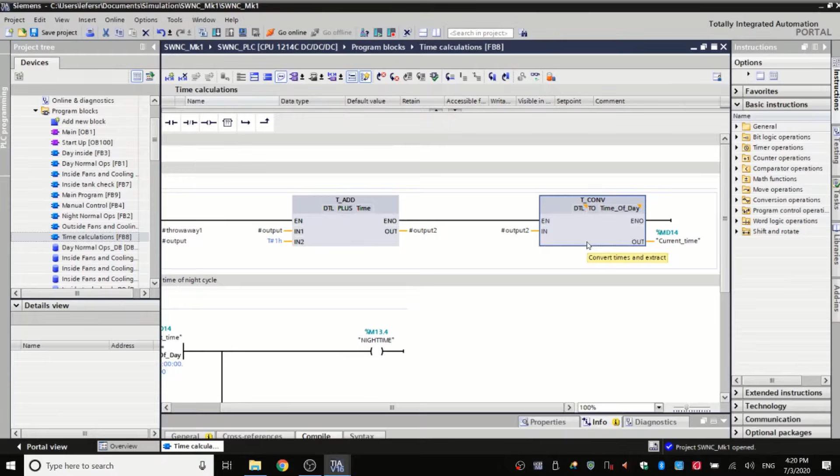I've put this together as when I was getting into PLC programming, my first port of call was the online forums, which can best be described as just a hot mess of confusion. Following this, we got the trusted F1 key, and granted it goes into a lot of depth and it is really good, but it's one of those catch-22 situations. It only really makes sense once you know what you're doing. But bear this in mind because we will be touching on it later in the video.

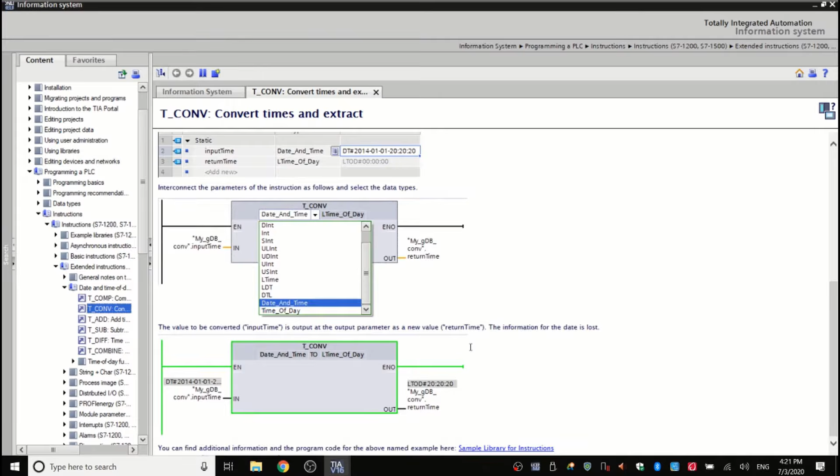So I've made this video for people like me with no formal training in TIA Portal, but they just need to find a solution to get the job done. So speaking of which, you click the link, you know why you're here. Let's be honest, it's a pretty niche video. It's not going to be hitting the trending page anytime soon.

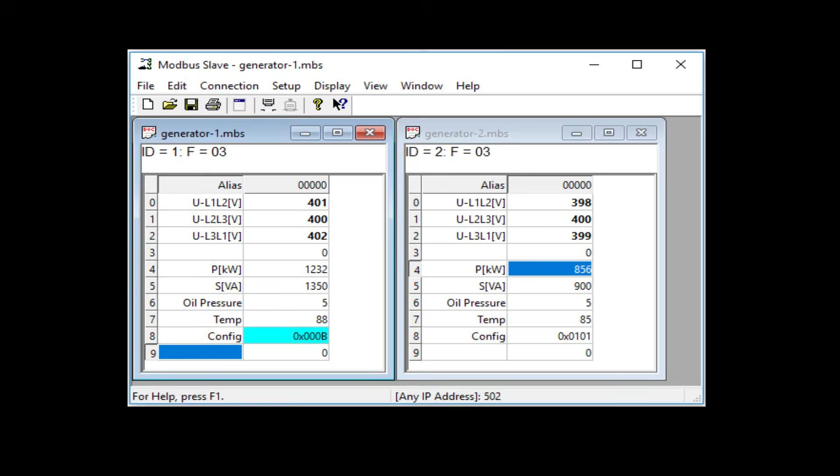So today we're mushing together a Siemens 1214 PLC and a CB 1241 comms module insert and getting that to talk to a Modbus Slave that is running on my absolute unit of a field laptop. That's the dull hum in the background I'm hoping my microphone's not picking up. So let's get started with the wiring. How do we put this thing together?

Right, so here I've drawn out the schematic of how I've wired my module up. At the top we've got the 1241 module, and underneath is my RS-485 to USB converter. We're setting it up in what's called a half duplex or 2-wire mode for the RS-485, and to be clear, RS-485 is the actual wire and hardware side of stuff, and Modbus is the protocol or language, if you will, that will be talking over that RS-485 connection.

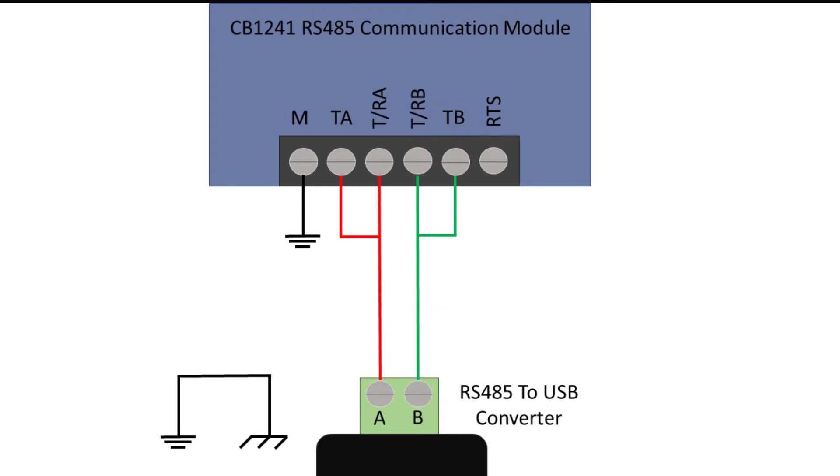As you can see, we've tied the TA and TRA terminals together, and the same on the B side, as there's some internal resistors in the 1241 module that we want to make use of. These wires go to the A and B terminals in the RS-485 to USB converter. The M is for the common ground, and you want to connect this to the ground of whatever you're communicating with. You may be able to get away without doing this, but especially here where I am, we got a lot of earthing and grounding issues, so it's kind of a must.

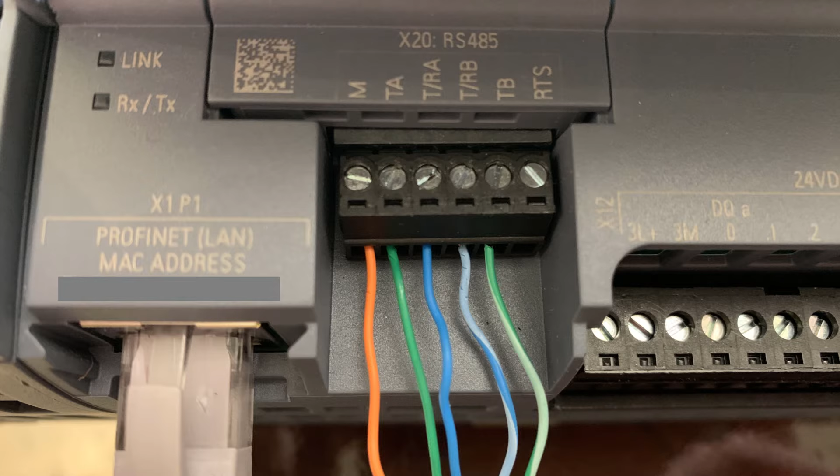Here you can see my actual connection. I got the TA, TRA, TB, and TRB connections all on separate twisted wires, as well as a separate connection for the ground. In this example, we're not going to be using any request to send signals, so I've left the RTS connector unconnected.

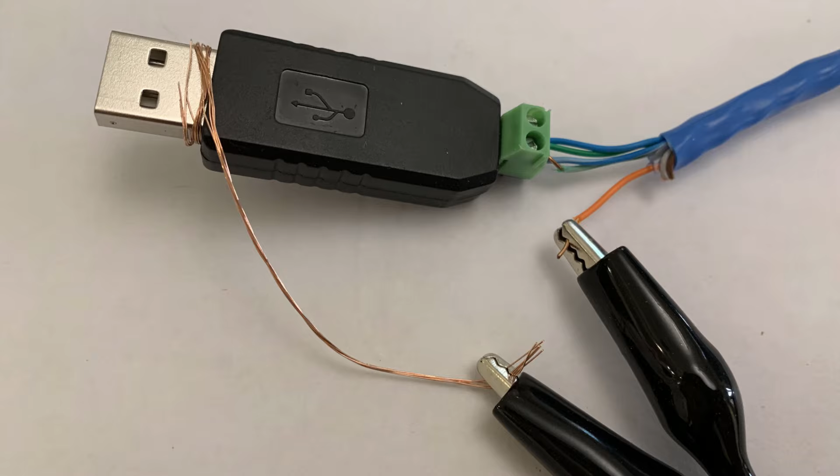Here you can see the termination in the USB device with the TA and TRA wires into the A terminal and the TB and TRB wires into the B terminal. In this setup, the little orange wire sticking out there is my ground. Like I said, the earthing situation here is a bit of a nightmare, so I've gone absolutely OG in connecting the ground of the module to the chassis ground of the laptop.

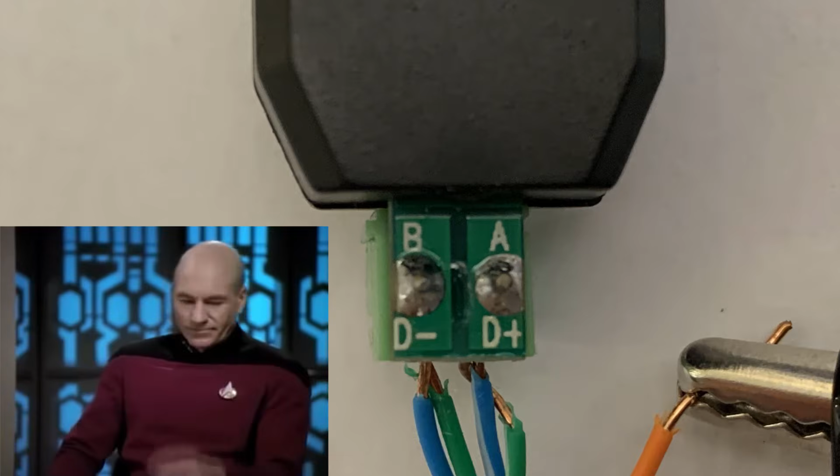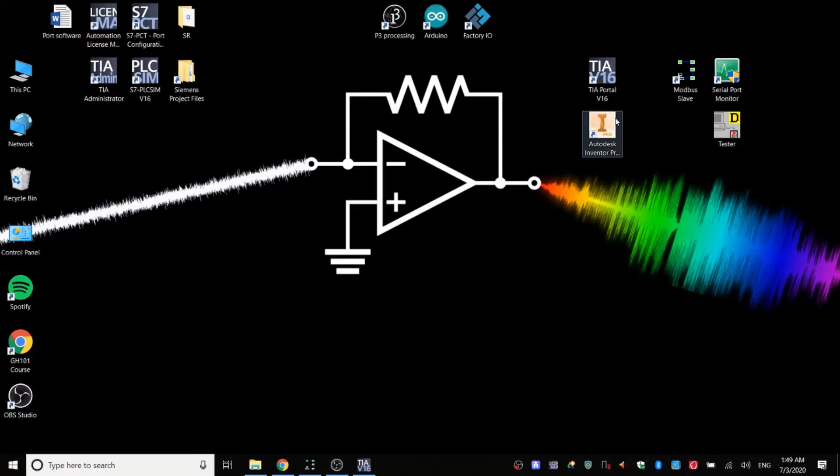Okie dokie, so that's the wiring sorted. Wasn't that fun? Now let's get into the guts of her and get this programmed up in Step 7, or TIA Portal, and down with the kids. Okay, so let's get to the programming side of stuff. So I'm going to start us off in a completely clean sketch, but the first thing I'm going to show you is the Modbus Slave. I'll put a link in the description to where I downloaded this from.

But we're just running a holding register here. So we've got 10 values in here from 0 to 9. Got most of them static. I've got the first one just iterating through some numbers so we can actually see that we got a live communication going on. For the setup, using slave ID 1, like I say, we're using a holding register, and this is going to come into it. So the address here is 0, the PLC address is 40,001, so remember that. Quantity 10 is just the number of these guys. That's about all you need to really know for this initially.

We're running it on a half duplex setup, so we don't have any request to send or anything like that. Oh, it is connected, there we go, I left that on. So in here, serial port, this is just my USB to RS-485 converter. I'm running at 9600 baud rate, 8 data bits, no parity, and 1 stop bit. Again, like I say, no RTS or anything like that enabled. And we're in RTU mode, not ASCII. So there we go.

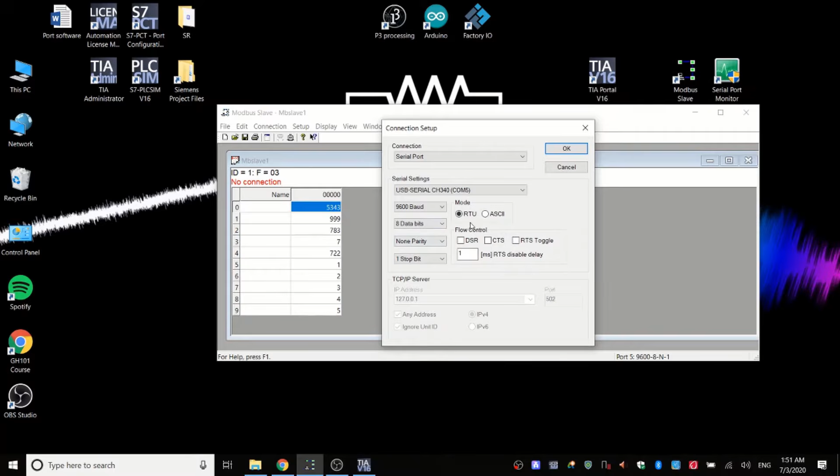That is all set up and running. Good. Let's get to the guts of the stuff. So it's a completely clean build. I wanted to show you it this way just because that's the way I like to set it up, so you're not overlapping memory bits with clock bits later on. But that's just me, so if you're better than me at this, feel free to do it in a different way. So I'm going to add a new device,

and this is going to take a while to load sometimes, so I might just pause this and go in super fast motion. Find a PLC. Pro tip as well, because I've got a bunch of different analog inputs and outputs on there, rather than having to specify them each time, if you come down here to unspecified PLC, I'm running a 1214 system, find the unspecified version of that, click OK, and then when it comes up we can just auto detect all the stuff on there.

It saves you a job having to find all the right serial numbers and versions of the right analog inputs, outputs, digital inputs, outputs, what CM board you have, all of that good stuff.

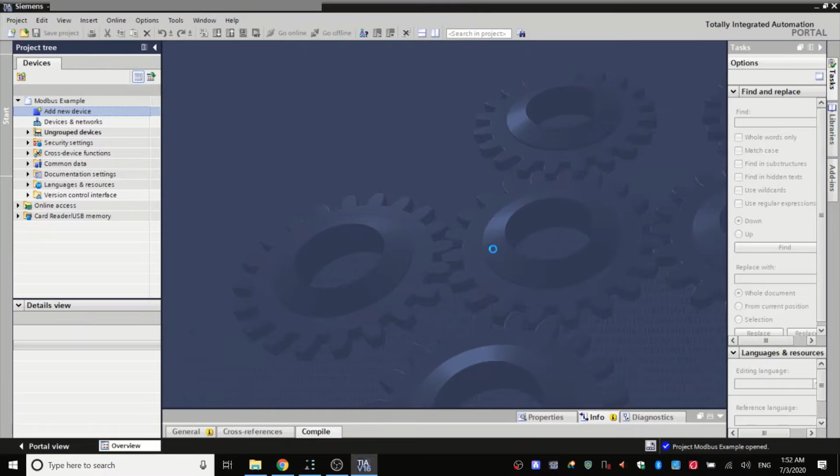Oh my god. Oh, there we go, that was fun.

Right, so as it's unspecified, we're going to go to detect.

I gotta make a coffee.

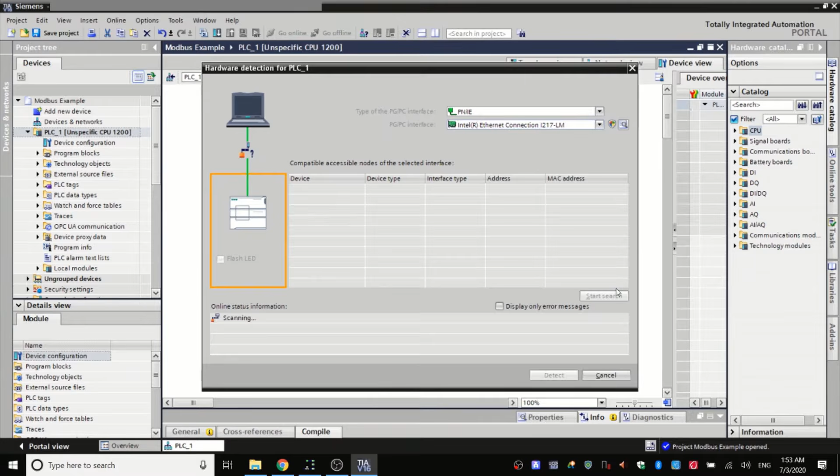Here we go. So have a look over the Ethernet. Now I've got my laptop directly plugged in to the PLC. So it's found a thing. Simple Modbus. Good. So it's found all that. Detect. And because it's found it, it should auto detect all the extra I/O I've got on there. Ta-da! There we go. So you can see I've got 4 extra modules on this side and the actual CB1241 itself on the front there.

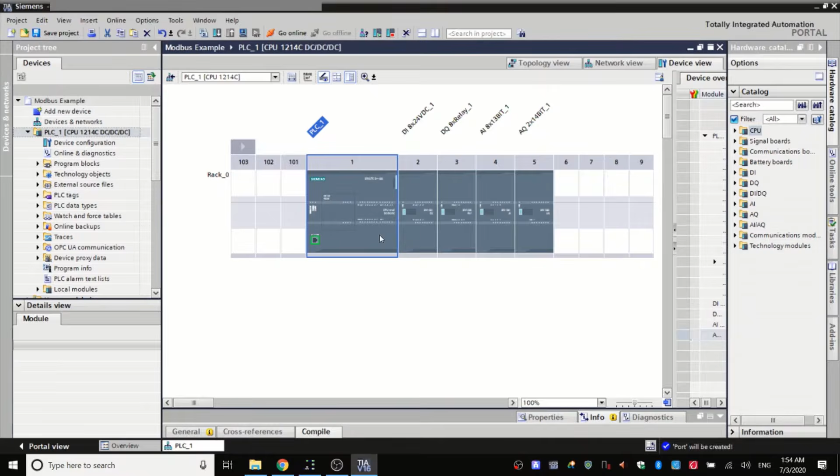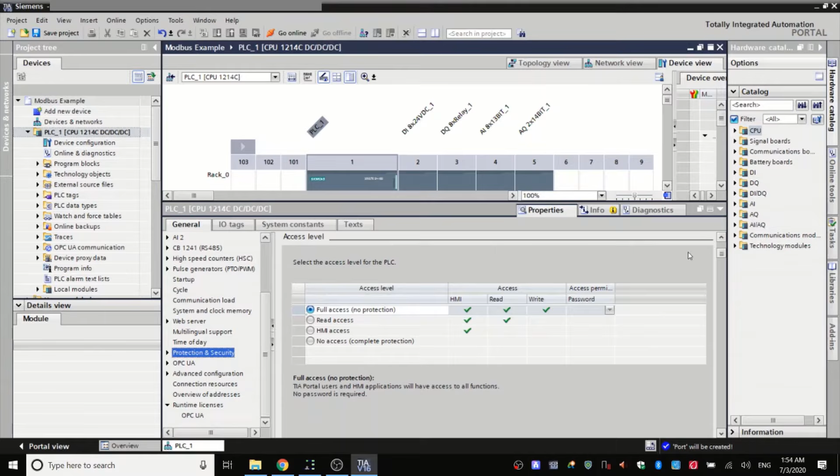So what I'm going to do, oh my god, it's still loading. There we go. Is pull up this guy to get the information for him when he loads. Here we go. So in the general, first thing we want to do is in protection and security is come down here when it wakes up. There we go. And we're going to turn on permit access to put gets. So that's one. And then you don't have to do this, but I find it helps a lot, is enabling the use of the system memory byte. So turning that on.

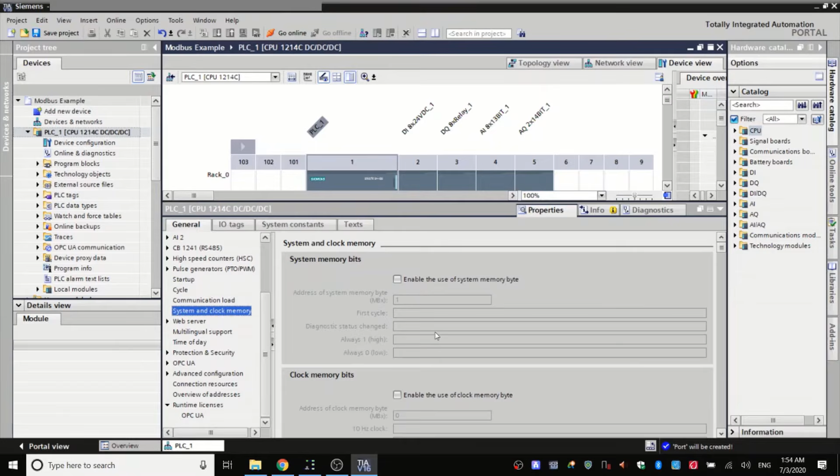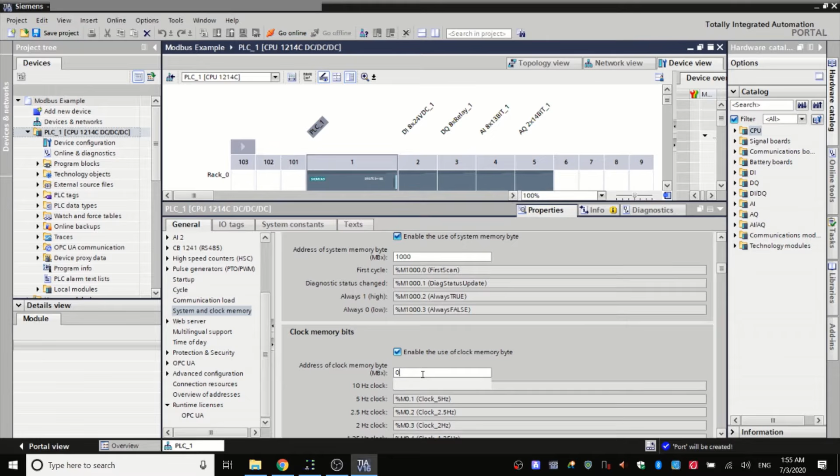There we go. And also the clock memory bits. And just me being me, I always overwrite these things when they're low, so I like to put them out of the way. So just put 1000 in there. It's only 4, and then this next one's 8, so we can set that as 1001. Fan-dabby-dozy. So let's open up our program blocks.

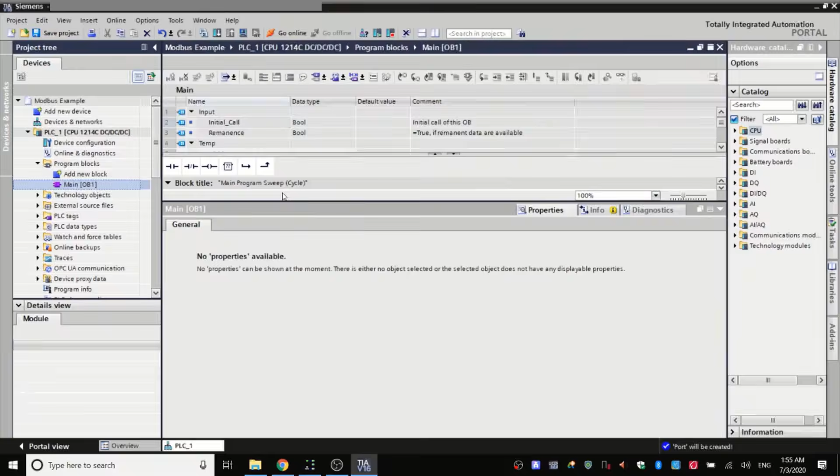We're just going to do this super simply in the main. You can make it as complicated as you like afterwards, but for now we're just going to do a lot of hard coding in there just to give you an idea of how all this goes together and how all that stuff works. There we go. So here's our main program.

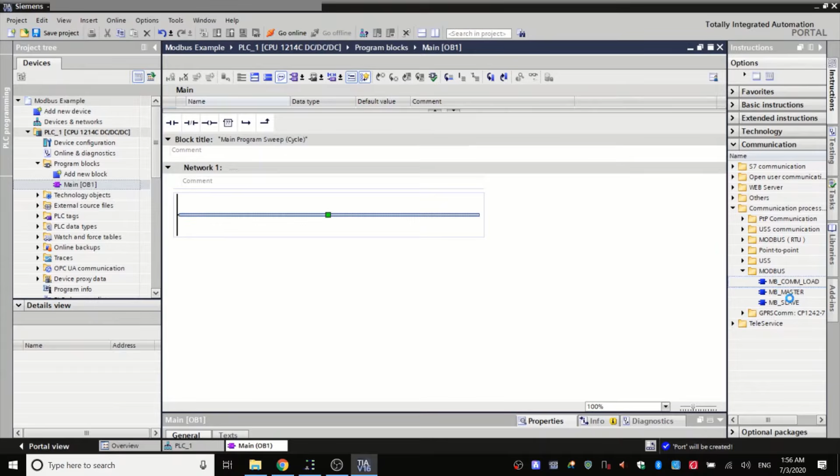Now the COMM load we want to run just once, so we're going to give it its own instance of a data block. COMM load we only want to run once when the whole program starts up, and then the master's the thing that loops and acts like a master, reads or writes to the holding register, the input register, output register, whatever we want it to do. And we're going to give that its own data block as well. Fantastic. Kind of looks like we know what we're doing. So for all the stuff down here and here, I'm going to come to in a minute.

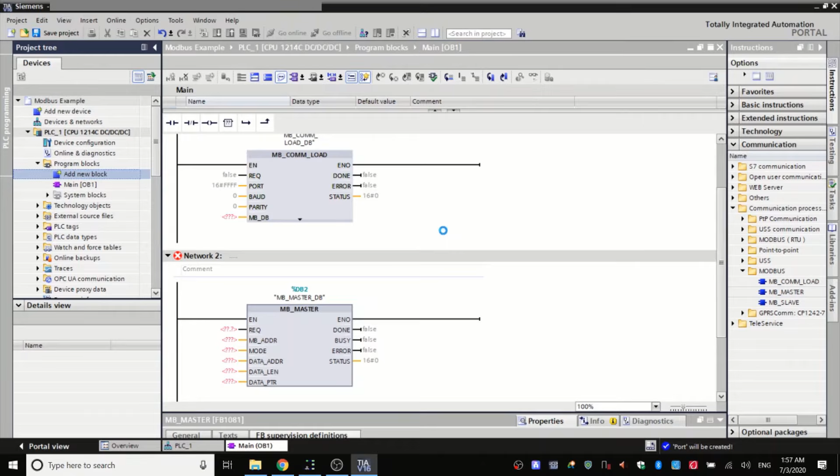First off, I'm going to make just a data block itself, just to hold all the stuff on this side and keep it all nice and tidy. So I'm going to add a new block that's a data block. Just leave it called data block. And I'm going to add the names of everything down here that is on this side, and I'll get back to you in 2 shakes of a lamb's tail.

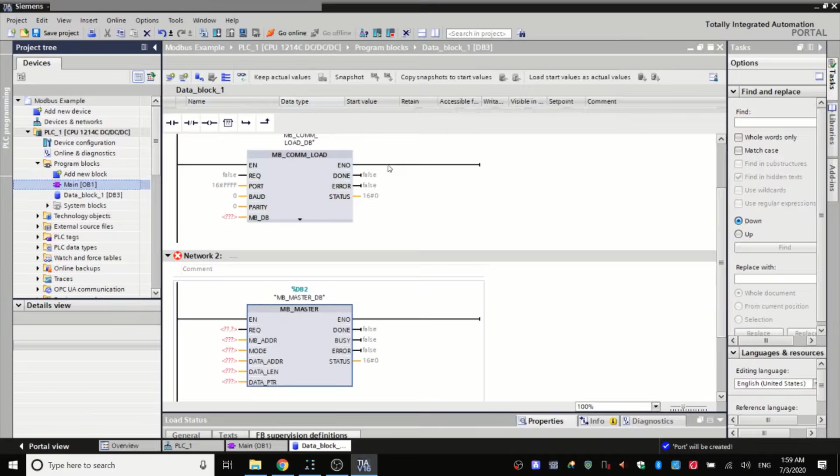Okay, we're back. So, like I mentioned before, I've created this data block. Inside it is mostly bools and some words, just to take the output from these blocks, just so we can utilize it in other stuff. But like I say, we're going to keep this really simple, so we're not really going to use most of it. So just going to put them in here. I'll probably speed this bit up because it gets a bit boring.

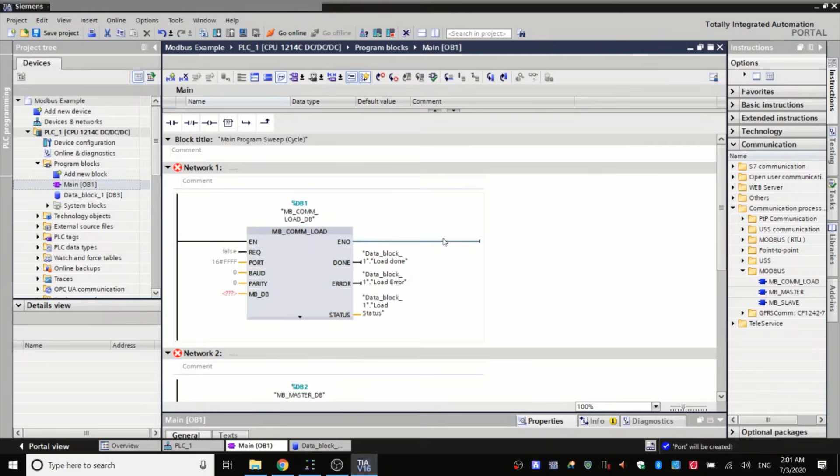Okay, so now this is all done. We have everything coming out of here and pointing to somewhere in this data block on this side. So basically all this means is when something happens and this load block is done, we can get a signal to know that it's done, and when it throws an error, we can see it's throwing an error and what the status of that error is. That helps us to debug later.

So the request, this is another reason why I like to initialize the clock bits at the start, because there's 2 ways you can do this really. There's something called first scan and initial call. Initial call, sometimes I just found it just doesn't work for me. I don't know why. If you know why, please let me know. Sometimes on startup it just misses its initial call. But the first scan has never actually failed for me.

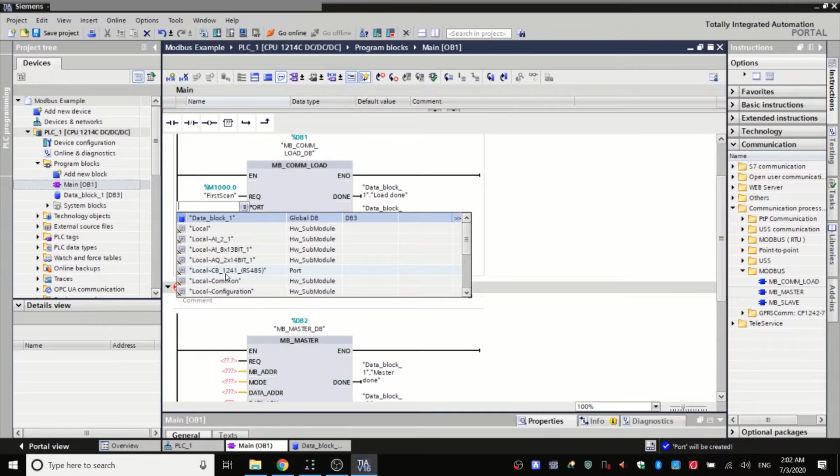So you can see here the M1000.0. That's one of the memory addresses that we initialized when we first started everything up. So we'll pop him in there. So this should just get 1 request the first time it starts up. The port, if you come in here, click there, and then just find the port that we're using. We're attaching a CB1241, so there it is. Click him. Done. Baud rate, as I've already said, is 9600, general standard. Obviously, your stuff might differ. I'm using 0 parity.

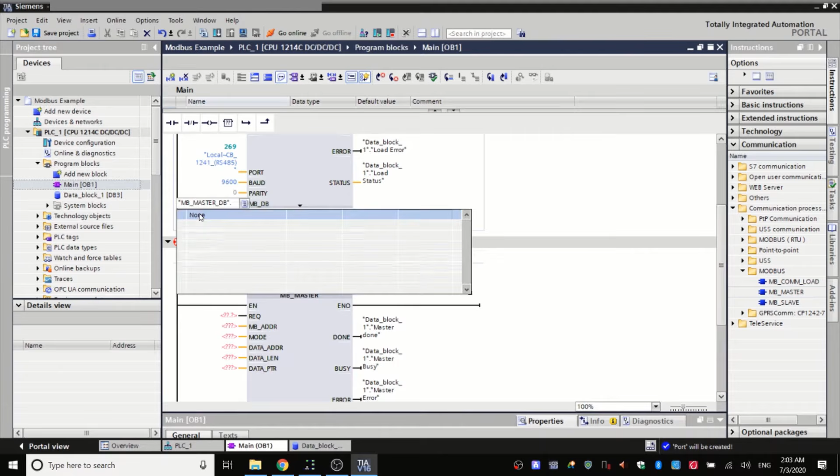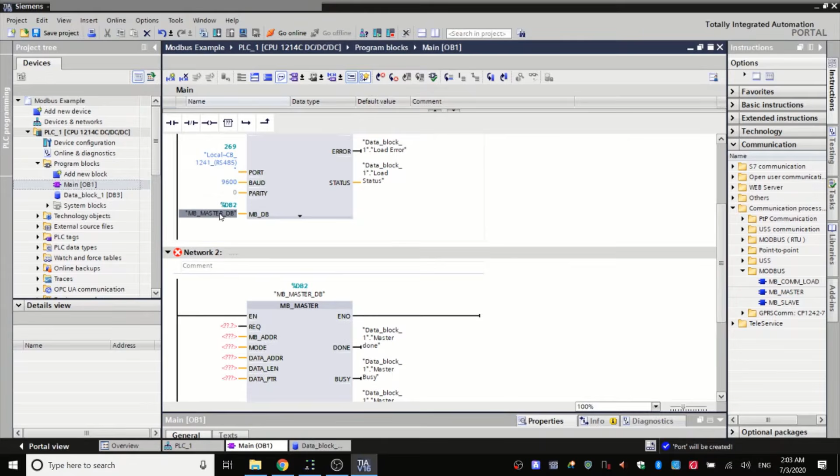The MBDB. Now, we want this to point to this instance here. So what we want to do is just come on here. If you just start typing, there we go, MB Master. Put it in there and then click none, because it adds this little dot for if you want to go into subsections. We don't want to do a subsection, so click that none. Now I have noticed in some other blocks that there's a bit of a bug, and even when you click none, it leaves that dot in there and it can throw up some errors. So there we go, we can see DB2 there, DB2 there. We're happy. So that is our load block done.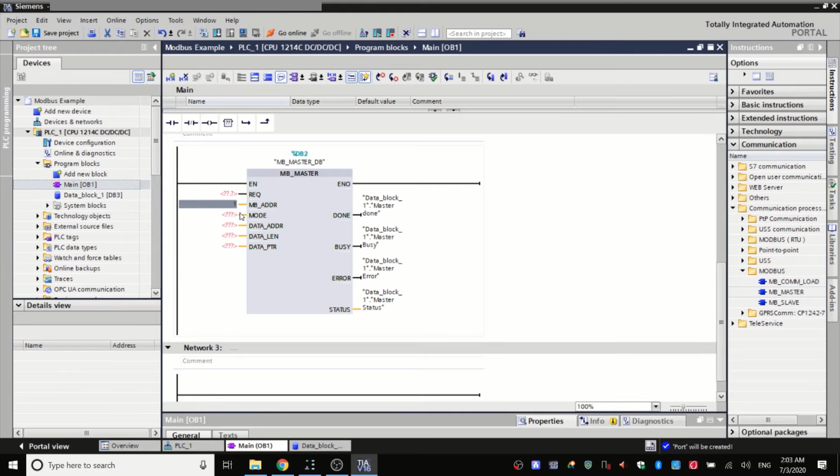For our master, we're going to come to the REQ in a minute, but the MB address, as I said before, in the slave definition, our slave ID is 1. Now, we're just going to hard code it in here as 1, but obviously if you've got a whole bunch of things on the bus with different addresses, you use a bit of code to loop through and iterate through all your devices, but we're keeping this super simple. That's 1.

Now mode. This is where I want to talk a bit about the F1 button. So if you click anything and press F1, you do get a very good help menu. But like I said at the start, it's only really good when you know what you're doing. Might have to give this a little while to load. There we go. So I clicked on the MB Master, pressed F1, and we're in. And this gives you a kind of description of everything.

So what the REQ is, MB address, and it does this for any block, and it goes into a lot of depth on everything. These are very, very helpful, because if you're anything like me, it'll be throwing out all manner of error codes. So you can come here, read across the error code, and get a bit more information about where you're going wrong and try and fix it. So what we want to do here is have a look at this mode function. So the mode, click on him.

Now, if you're used to Modbus and just getting into it from the Siemens side, this is where it gets a bit weird. So we have our Modbus function calls here, we should be used to. So 1, 2, 3, 4, well, you know how to count. The mode itself in Siemens is a bit different. So if we want to read an output bit, it's mode 0. If we want to read an input bit, it's mode 0. If we want to read a holding register, it's mode 0. It's all the same. So basically reading is 0, writing is 1 or 2, depending on whatever you're doing.

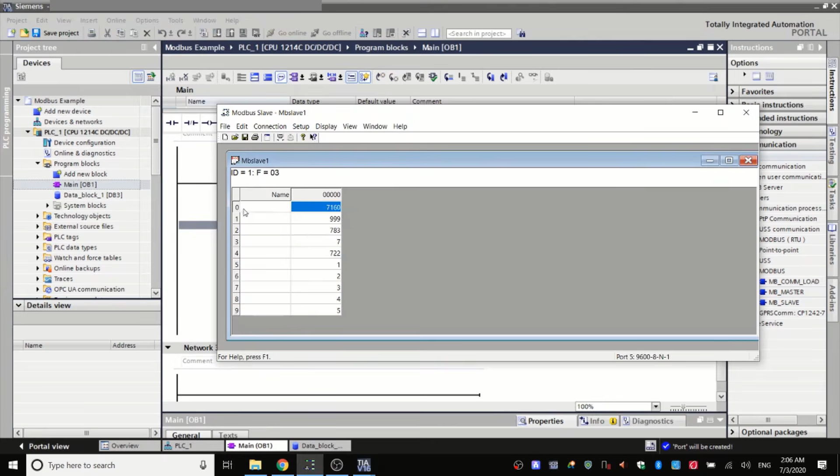So we want to have mode 0, and we want to be reading, well, starting at address 40,001. So if we go back into the code, change that mode to 0, data address, as we can see in here, we're starting at offset 0, which in reality is 40,001. Data length, again, we put this in before, so 0 to 9 is 10.

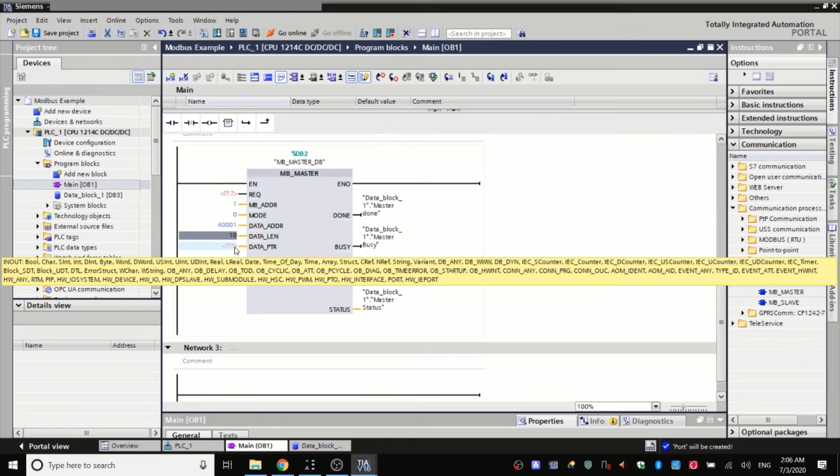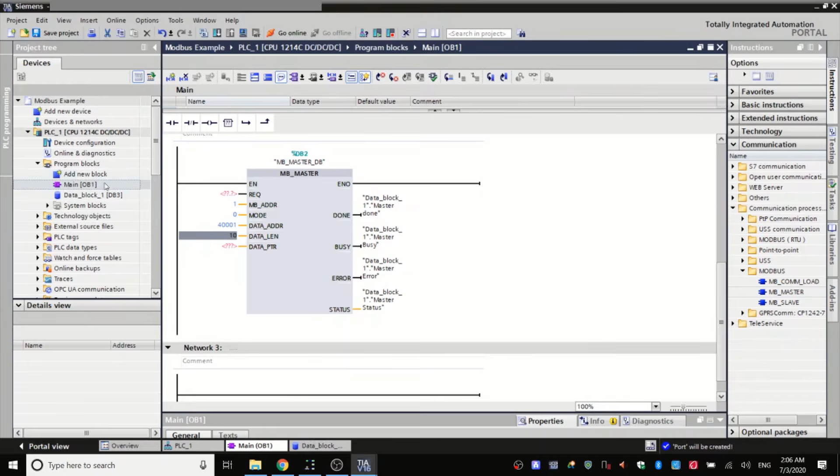And the data pointer. What the data pointer is, it points to the area of memory where you want to read from, write to, or what it's going to look for to do something with the data. So we're going to make a new data block. And on purpose, I'm just going to call this register. I'm going to show you one of the things that really tripped me up when I was trying to get my head around this initially.

So what I'm going to do is just create an array. What should we call it? Whatever. We're going to create this as an array of integers. Nope. Anything but that. And we're going to make it an array of 10 integers. Look at that. Boosh. There we go. So that's all set up. All of these have a starting value of 0, so we know where we're starting from.

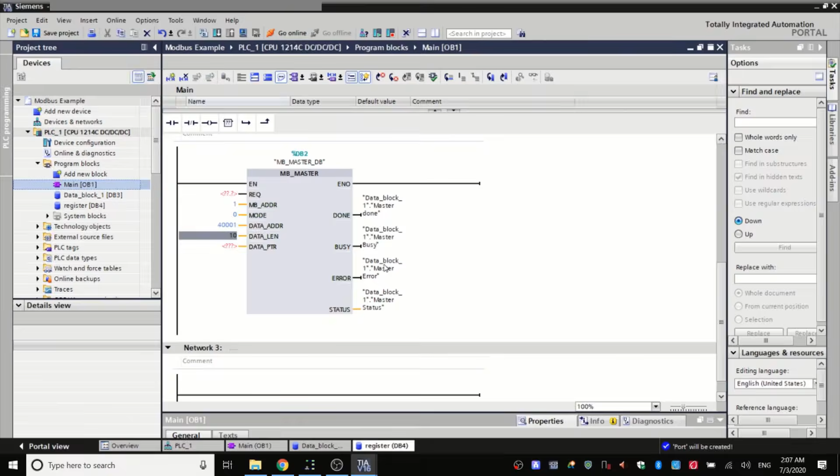And now if we go back to this, we want to point this data pointer to that register. So we come in here, have a look for register. There he is. Click him. And we want to point it to the array, but we don't want to point it to a particular byte in that array. So when we get to this bit, we don't click on the individual bits, we just click none at the top. Again, it hasn't put the dot at the end, so that's all working okay.

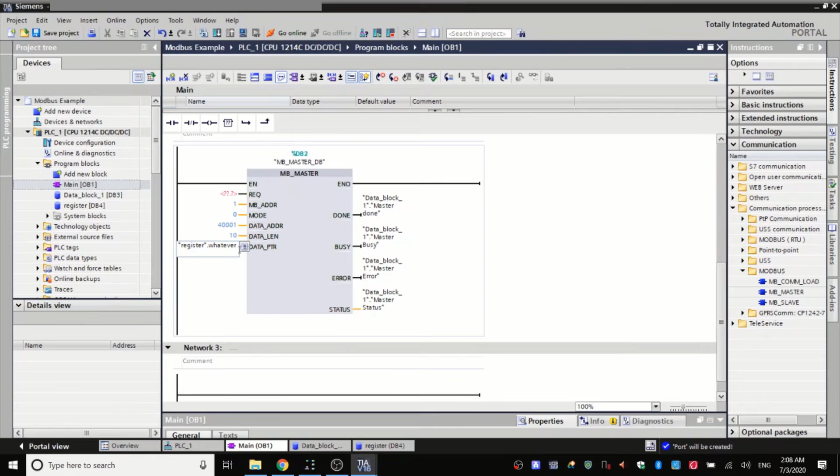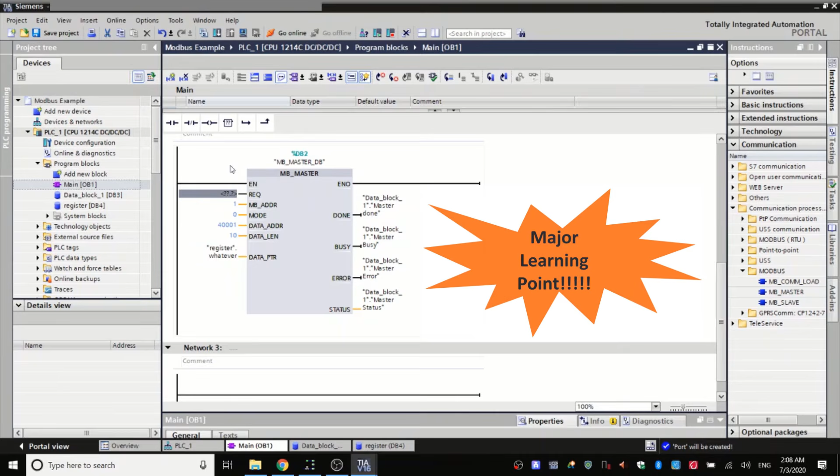Press enter. Now this is the crucial bit, because it all looks good, but if we ran this, it'd be throwing up errors left, right, and center about invalid data pointers, but we've put it in there. So what's the issue? And again, if you know more about this, lots of people know a lot more about this than me. Please get in touch and let me know why.

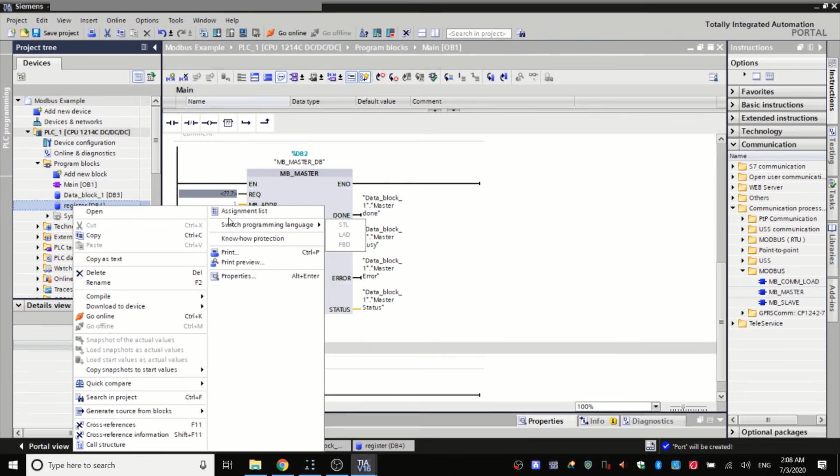But what we have to do is, register block, right click him, go to properties. In the properties, in attributes, we need to disable this optimized block access. And when we disable that, we get this little warning message, click OK, click OK. And now it can actually look at that memory address and point towards it, write data to it, and read data from it. Why? I don't know. But yeah, it works. If it works, it's not stupid.

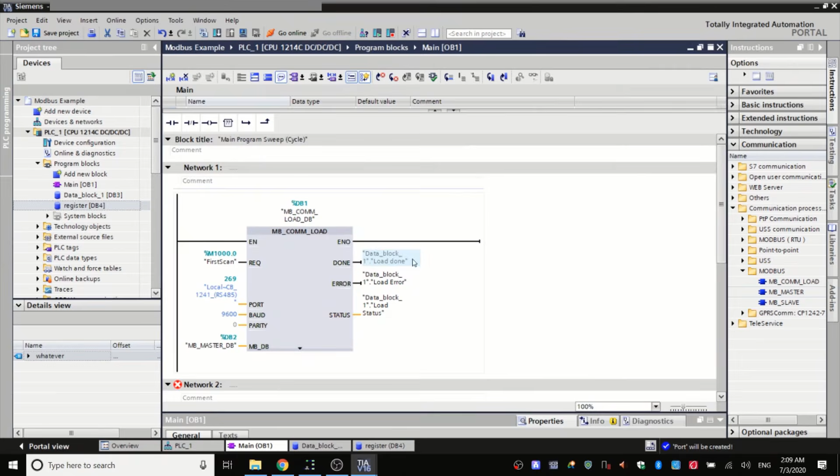So the only thing left we've got to do is this request pulse. So what I'm going to do is utilize the fact that we know when this is done. I'm not going to build in any sort of error recognition. You can do that off your own backs later because it's just simple logic. But what we're going to do is create an AND gate in LAD, which is just 2 of these because I'm old school.

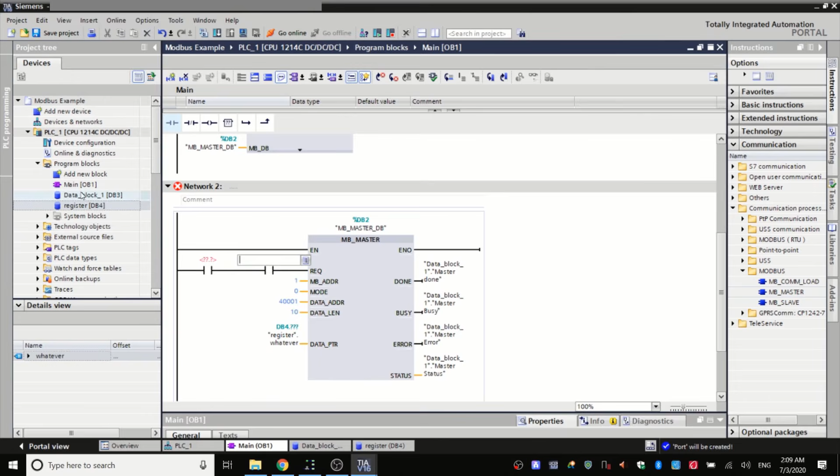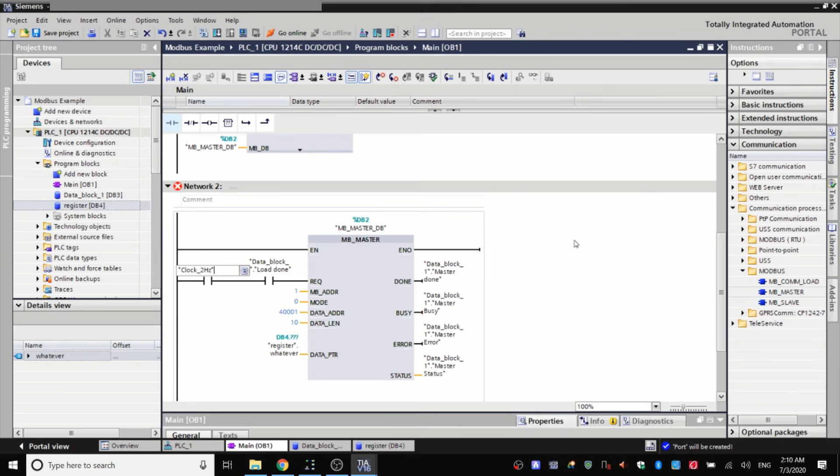And we're going to put in, what data is it in? It's in the data block. So we have a look in the data block, and we want to have a look when load is done. So when that is true, we want that switch closed. And for this bit, because we've initialized the clock pulses as well, we can come in here and start typing clock, and we can look and say, clock 2 Hertz. There we go. So this is going to be pulsing 2 times a second, but it's only going to get through to fire the request when this block is done.

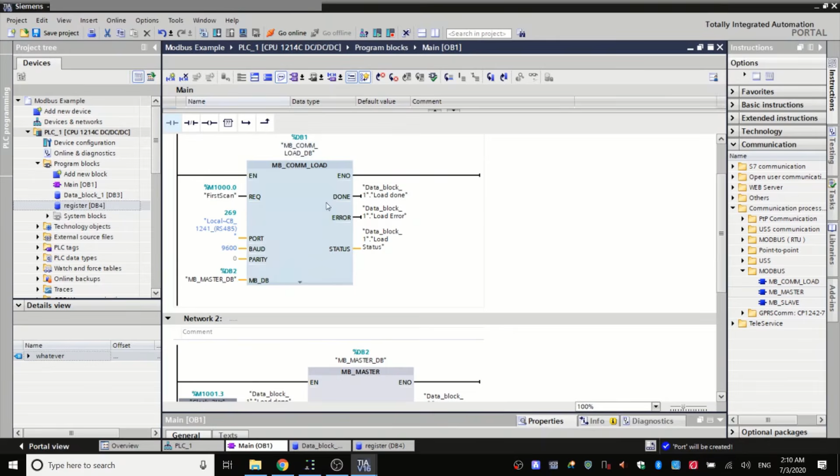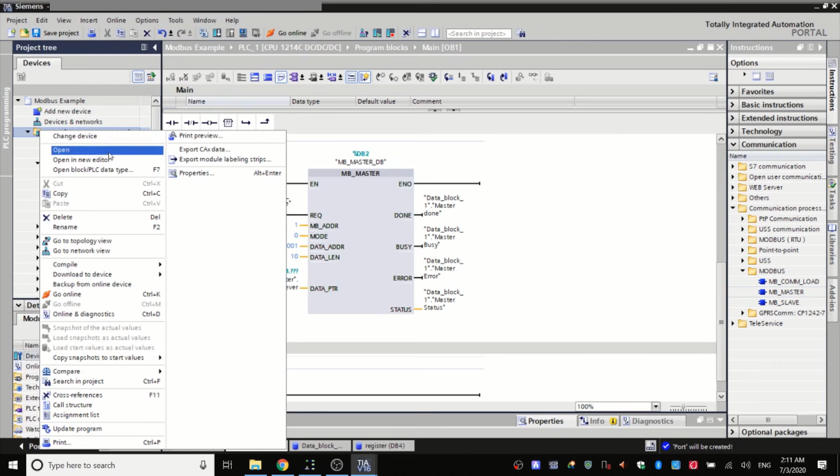And that is that. That should work. So this is now where we need to come to uploading it to the actual PLC. Uploading it to the PLC does cause a lot of weirdness if you just go straight up here and download it straight to the device. Because this is a brand new install, what we want to do is come up here to the PLC 1, right click it, and before we do any actual software uploading, we want to do hardware.

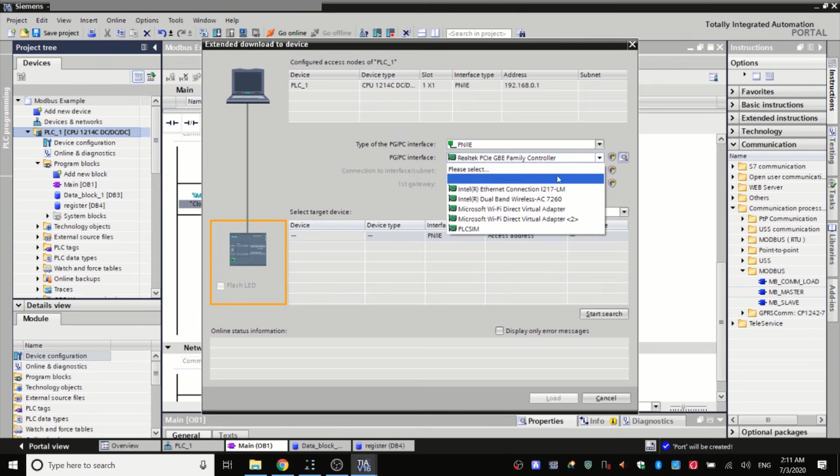And we want to do, well, let's just do it in 2 bits. Oh, that's compile, sorry. So download to device, hardware configuration. And this is probably taking ages to get its act together again, so there might be a bit of fast forwarding in the edit. Oh no, here we go. So Ethernet connection, start the search. So it's found it. So we're going to load the hardware. It'll come up with a whole bunch of stuff. Basically say yes to it. There we go, load.

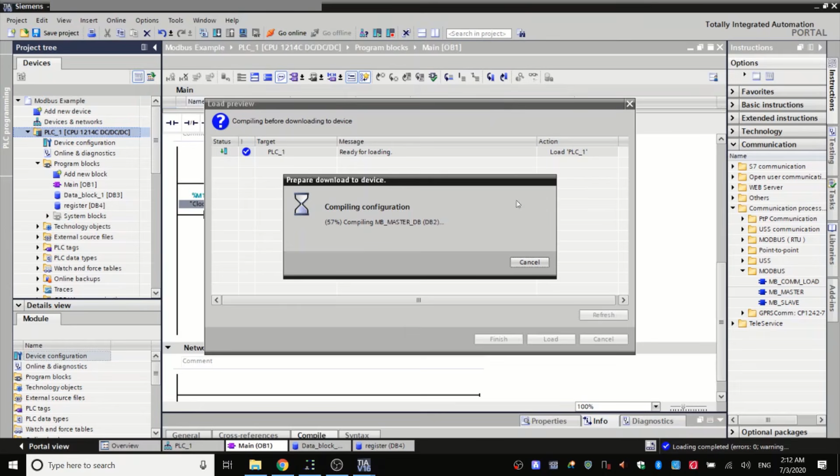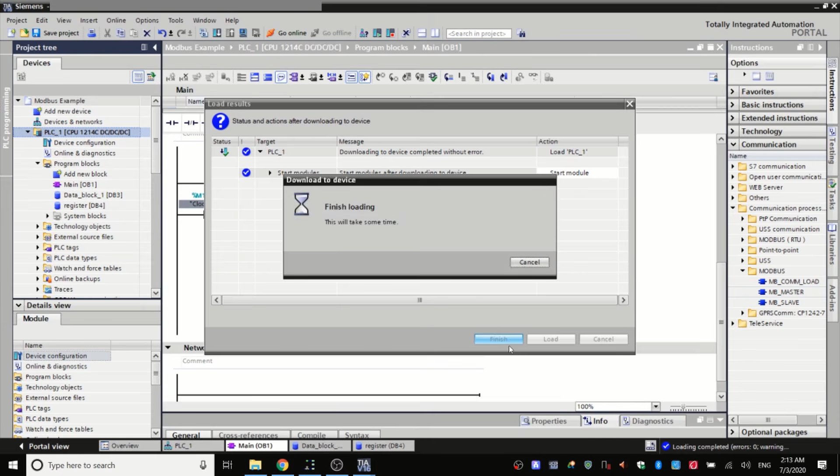Fantastic, so we've got our hardware configuration up there, and now we want to put up our software. So download to device again, software all. And here we might have to actually tell it to stop and take a breather while this comes on board. Here we go. So yeah, no action, we need to tell it to stop. And then we can load it. Fantastic. So this should all be working.

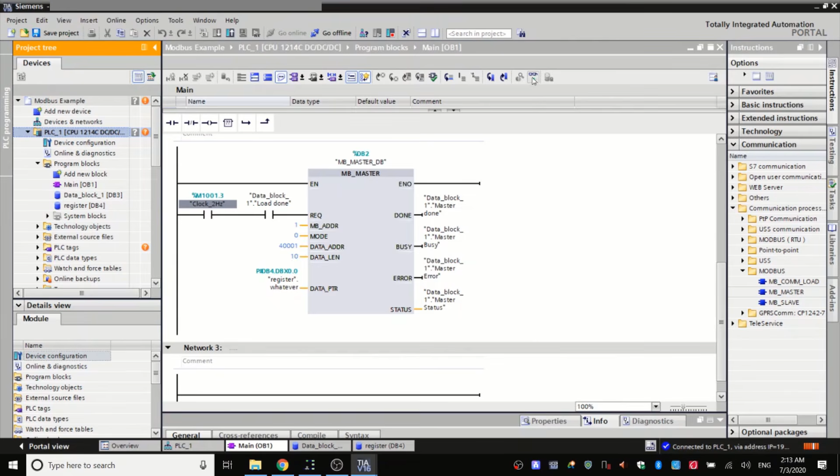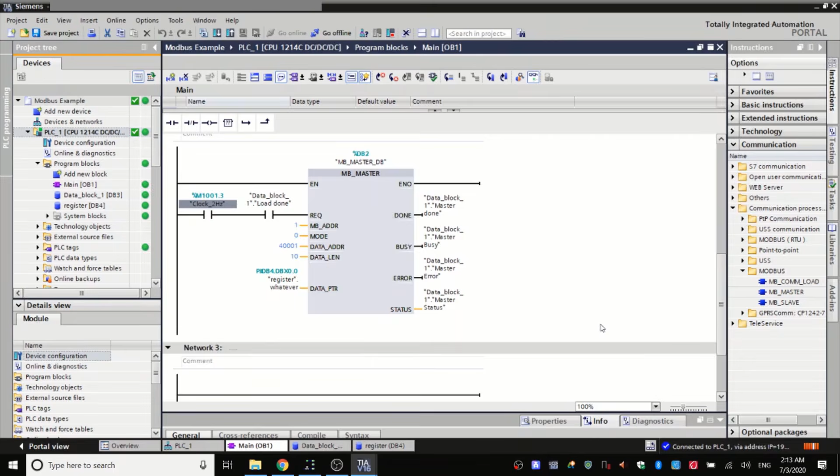So we're going to go online. And we're going to monitor this. Impossible. Oh, I mustn't have started it properly yet. Wait for all the greens. There we go. It is running very slowly today. Now we can monitor. Here we go. So we can see on our load, the first scan will have fired. Done is true. That's good. Error is false. That's very good. And then the 16#0000 just means no errors. So I'm a happy man.

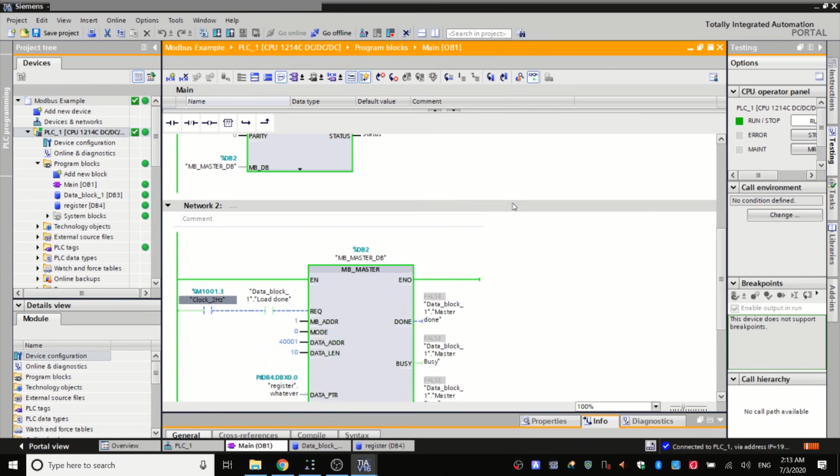Coming down to this, you can see because this done is true, this is true, and now we'll be firing this at 2 times a second. The refresh rate of the monitoring isn't that quick, so it's not really picking up that it's 2 times a second. And the done will only be true for 1 scan in this thing. So again, we're not going to pick that up on the refresh rate, but we can see we're not throwing up any error codes. Our status is no error. Everything's happy.

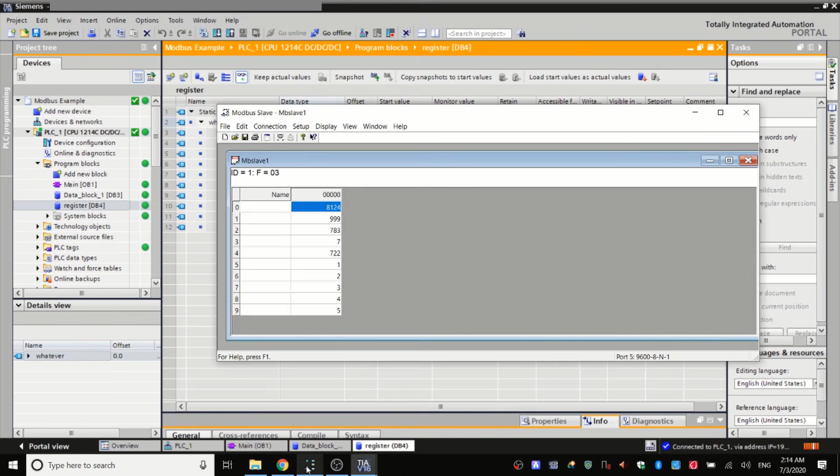So let's go to the register itself. Have a look at what's going on here. So monitor, and these values, if I've done my job right, should match what is happening in the holding register, and it is, which is a relief. There we go. Okay, so that's reading to a holding register. How do we write to a holding register? Well, using what we've just learned, it's super simple.

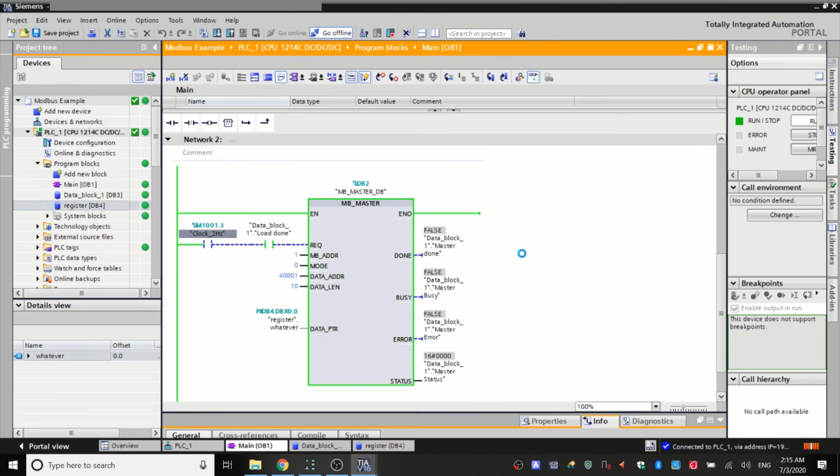We'll go offline, have a look at the help. Always good to just cross-check this. So that was reading to a holding register. Let's try and write to a holding register. So we come down here, writing to a holding register. That's what we want to do. The actual address is the same. So 40,001, same register. But we need to change mode from 0 to 1.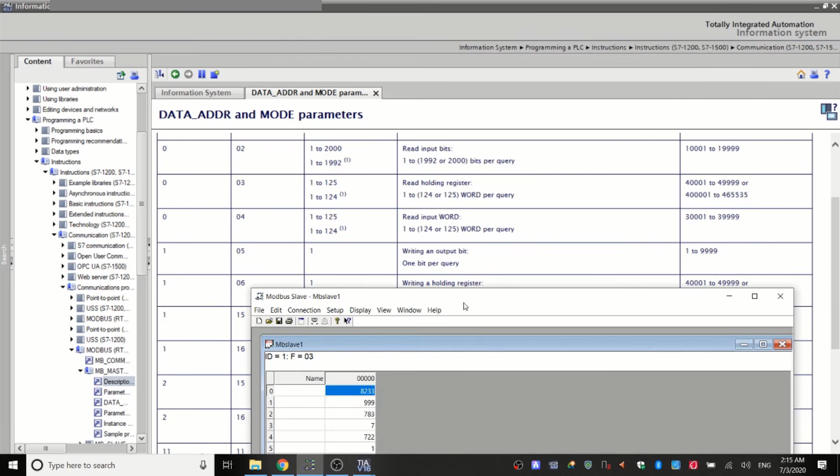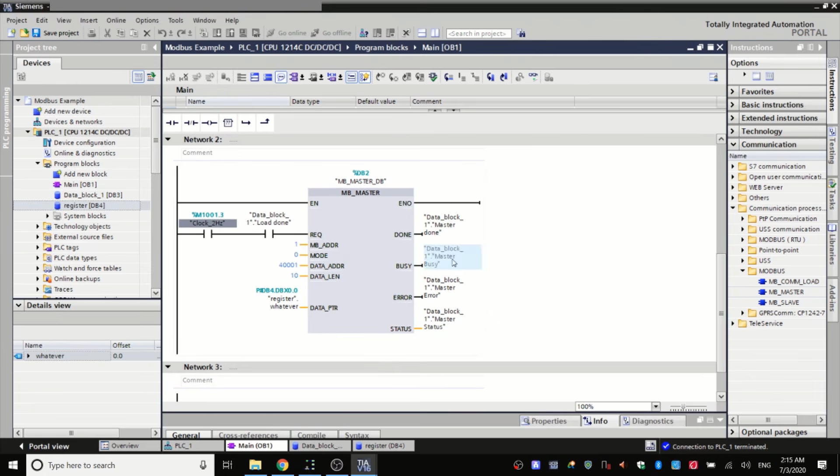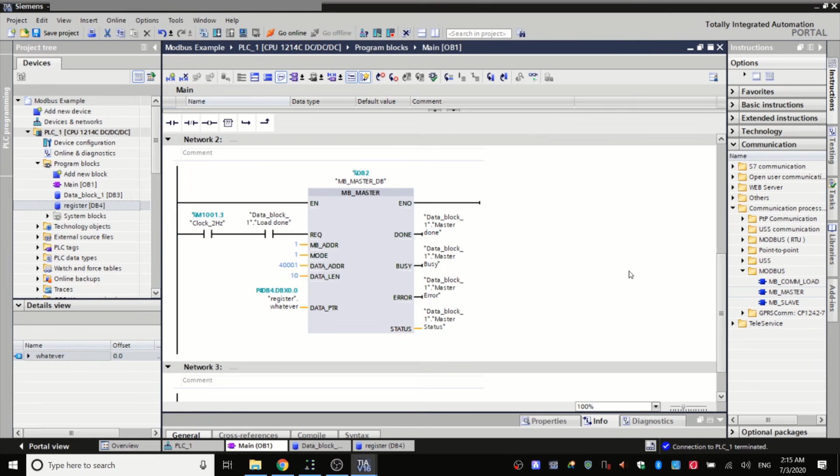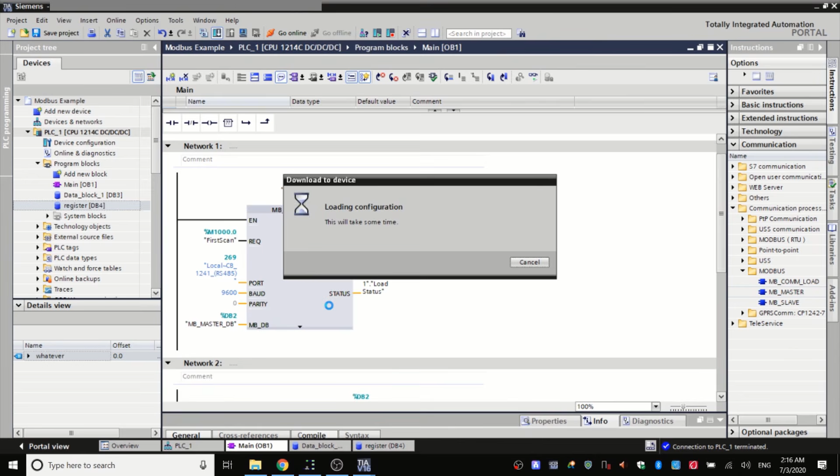So I'm just going to do a bit of housekeeping in my Modbus Slave, so that's not auto incrementing anymore because that just causes all sorts of naughtiness. I'm going to come down here, change this mode, hard code it to 1. Like I say, feel free to make that a variable. In fact, it'd be pretty poor if you didn't make it into a variable in a bigger program. But yeah, we're just keeping this super simple for now. We're going to re-download that. We've already done the hardware stuff, so now we can just throw up this updated file. We haven't changed anything massive. So there we go, that's all happy.

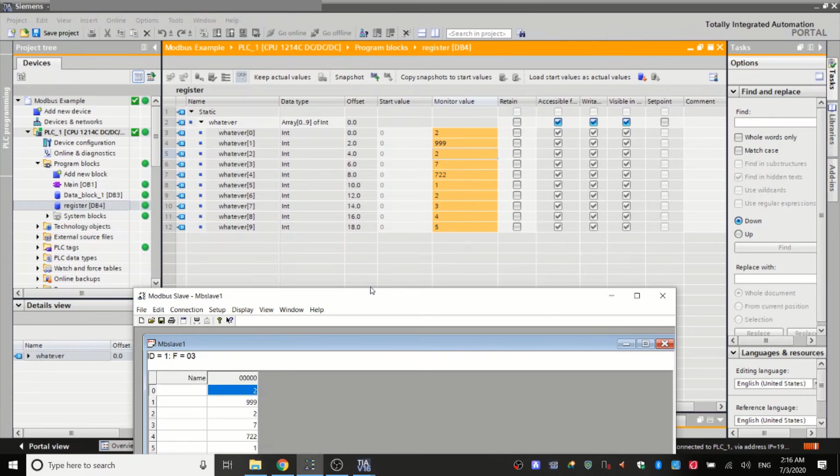And if we go online again and do some monitoring of what's going on in our registers, when it wakes up, here we go. So what's actually happening now is we're writing whatever's in here to here, and shock horror, they're both the same. But if we come in here and change this 8000 whatever to 2, you can see in here, first register has changed to 2. There we go, 2. Hours of fun. There we go. So that is how you read and write from a holding register from a Siemens PLC.